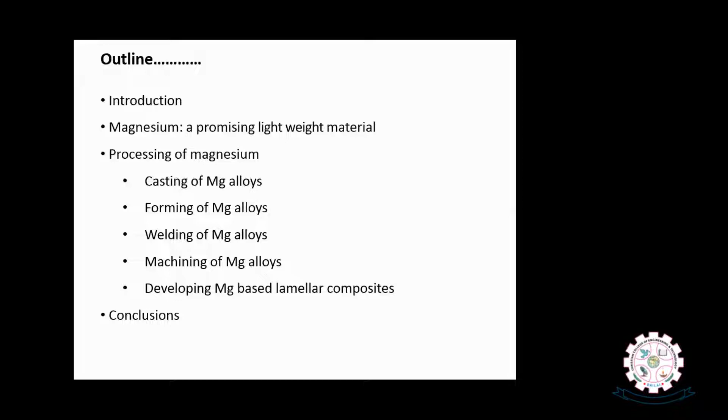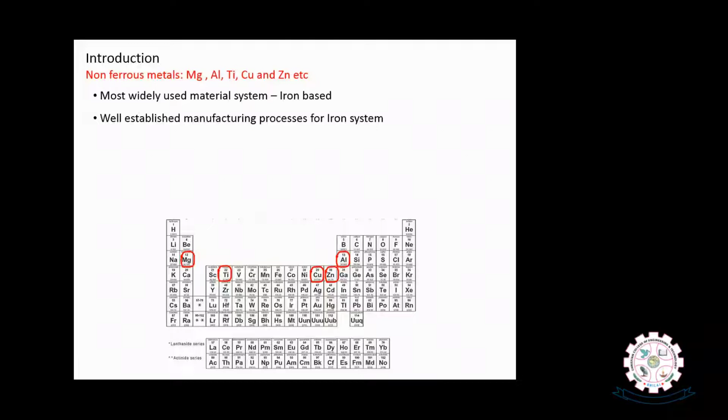In the manufacturing processes, it is well known that iron-based materials, steels, and cast irons are widely used. Whereas when it comes to non-ferrous metals, very recently for lightweight applications and with a high strength to weight ratio for better performance, even for less fuel consumption in energy efficient applications. As we know, aluminum alloys are widely used, and very recently the interest is slowly shifting towards developing magnesium-based alloys and magnesium-based composites.

There are a number of non-ferrous alloys which are used in industrial applications - magnesium alloys, aluminum alloys, titanium alloys, copper alloys, and zinc alloys. My presentation is completely focused on magnesium alloys and the processing of magnesium alloys. Why have magnesium alloys now grabbed the attention of researchers in the materials and manufacturing engineering domain, right from structural applications to even medical applications.

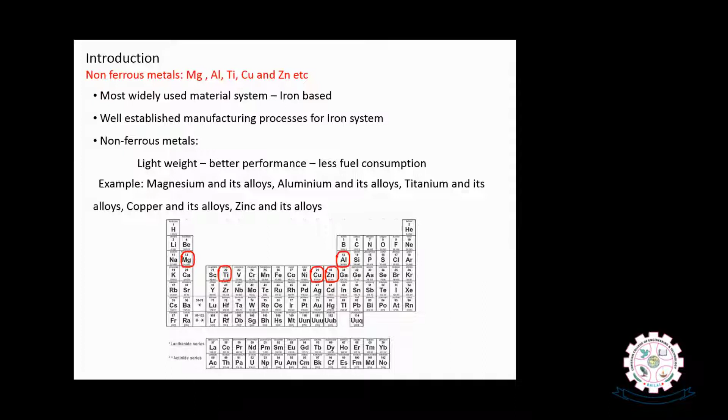So a few aspects we would like to present in this topic, and we'll see some case studies and some of our research results also. Basically magnesium is a material that is very difficult to process, but upon successfully using magnesium and its alloys as candidates to develop structures or components or parts, we can find a number of potential applications, especially in transportation industry, automobile industry, aerospace, and other lightweight structures industries. Advantages with magnesium include low density and high specific strength compared with aluminum. The density of magnesium is 30% less than aluminum, and the load bearing capacity of magnesium is higher than aluminum. So this is the beauty of magnesium compared with aluminum.

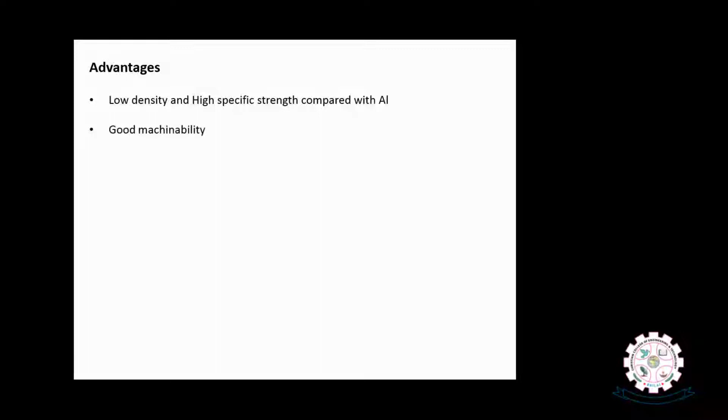And good thing about magnesium is you can machine it well. The ease of machining is good in magnesium based materials, and magnesium can be easily produced through casting, and therefore there are a number of casting methods that have been developed to produce components using magnesium alloys, such as high pressure die casting.

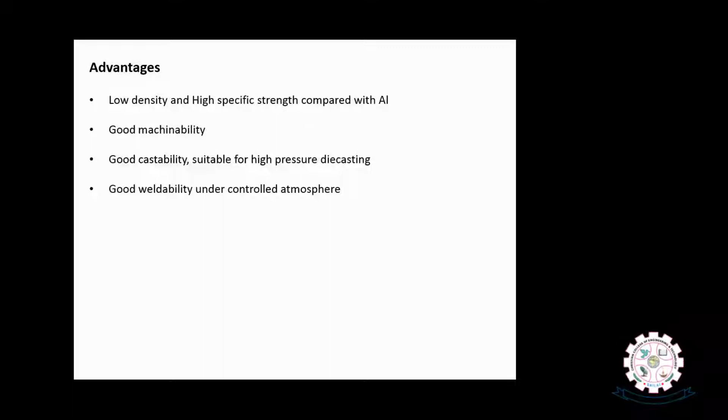Magnesium materials can be joined together by welding. However, we should use a controlled environment. We should provide controlled atmosphere to avoid oxidation.

Another important, promising property of magnesium is its excellent damping properties compared with aluminum and other non-ferrous metals and steels. This qualifies magnesium alloys as promising materials for developing structures where vibration arresting is of prime importance.

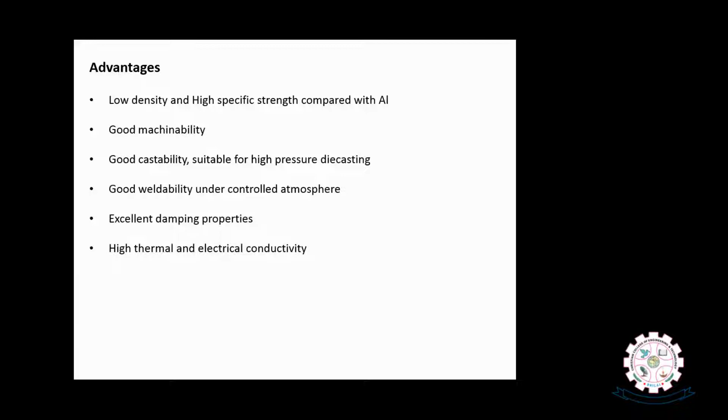Magnesium has high thermal and electrical conductivity and high dimensional accuracy and stability compared with polymeric materials, even though it is light compared with aluminum. So even comparing with polymers, which are also lightweight materials.

Magnesium being a metal will give better mechanical properties, resistance to aging, better electrical and thermal conductivity, and ability to recycle magnesium again and again to produce components. These are the advantages when we look into magnesium based materials. However, there are a number of limitations also.

That's why for the past 50-60 years, a lot of research is going on in developing new magnesium alloys and composites to address these limitations for specific applications.

Its low elastic modulus and brittleness compared with aluminum, difficulty in mechanical processing at room temperature, and limited strength and creep resistance at elevated temperatures. With respect to temperature, the ability of magnesium to withstand loads, compared with aluminum, drastically decreases.

It has a high degree of shrinkage during solidification when we adopt liquid processing routes, and high chemical reactivity, especially when exposed to a corroding environment. Compared with all other non-ferrous metals, magnesium undergoes very rapid corrosion.

It is a big problem, high corrosion rate because of high reactivity, and less formability at room temperature. It has good machinability, but when it comes to formability, magnesium needs elevated temperature to deform. We will see a couple of slides on forming of magnesium.

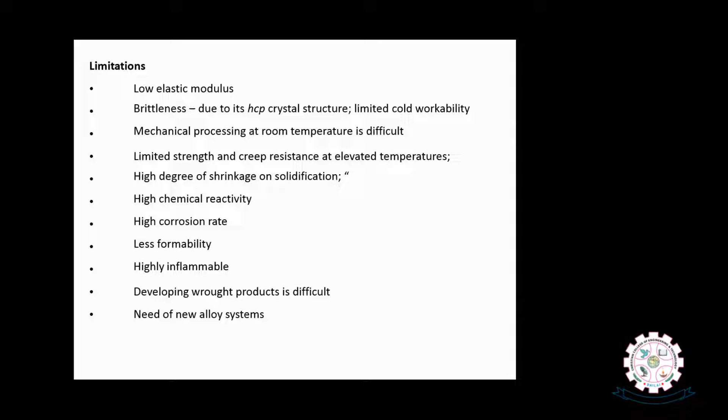When we see the usage of magnesium traditionally, the maximum portion occupies the alloying element for developing aluminum alloys. So magnesium is one principal alloying element usually added to aluminum in developing several aluminum alloys.

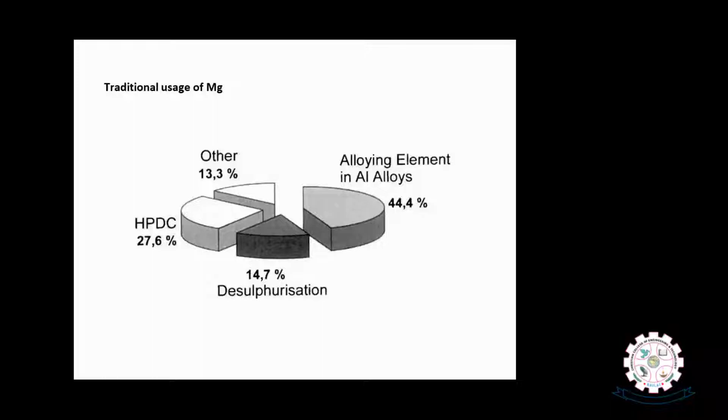It takes the major fraction, and the next fraction is high pressure die casting to produce magnesium based components. Then desulfurization and other applications are the important areas where we'll see consumption of magnesium for the past one century.

We'll also see the role of different alloying elements, the influence of chemical composition on the bulk properties of the developed alloys and composites, and how different alloys contribute.

For example, addition of lithium, zinc, aluminum, manganese and copper will give those kinds of alloys excellent specific strength at light weight, with the ability to bear higher amounts of loads.

Whereas when we add additional elements like rare earths, silicon, yttrium, such elements, the magnesium alloys developed from these elements will give better creep resistance.

And particularly, magnesium-silicon, magnesium-aluminum, and magnesium-lithium based rare earth containing alloys will give us improved ductility along with increased strength.

There are a number of processing routes developed to produce magnesium based composites, as well as particle and fiber reinforced composites. This comparison will help us understand the important role of alloying elements in improving or even affecting the bulk properties of magnesium alloys.

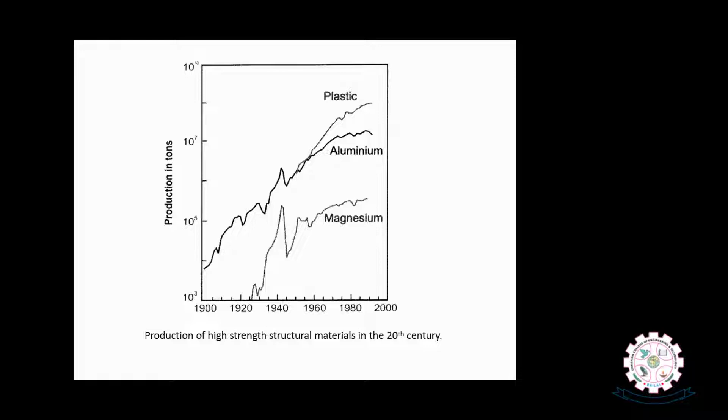In later years also, the consumption of magnesium is slowly growing compared with other materials. This indicates magnesium is becoming one vital source for lightweight structures to develop components and products, apart from the available aluminum alloys and polymer based materials.

Applications of magnesium are found everywhere, across all kinds of industries like marine, aerospace, automobile, and locomotive.

When developing components using magnesium-based materials, we usually consider three important factors: material, method of construction, and process, the technology used to produce the desired components.

When it comes to material, depending on the targeted application, we focus on required properties for magnesium alloys, such as corrosion resistance, energy absorption, creep resistance, fatigue limit, or degradation due to mechanical contact.

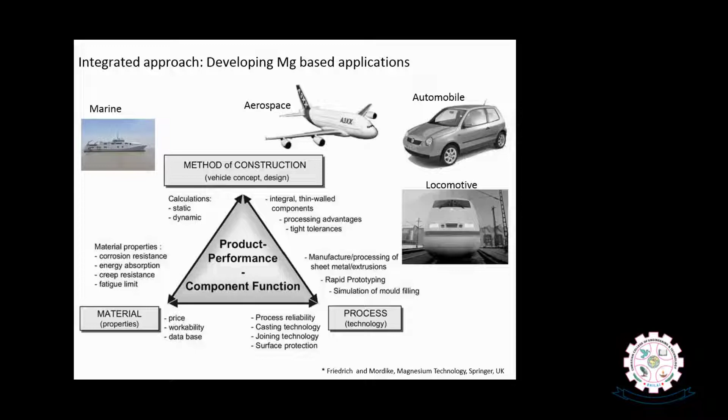These photographs show applications of magnesium in automobile components and automobile parts.

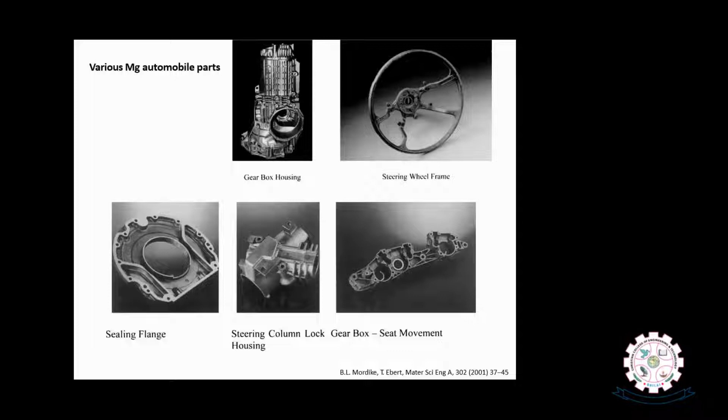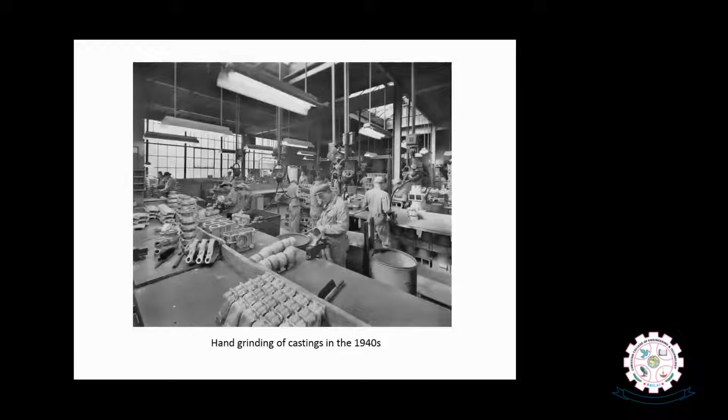In the 1940s, a typical photograph shows hand grinding of cast magnesium components in industries when they were subjected to mass production. And here the exhibition from the 1960s shows different components for different applications, made totally of magnesium alloys.

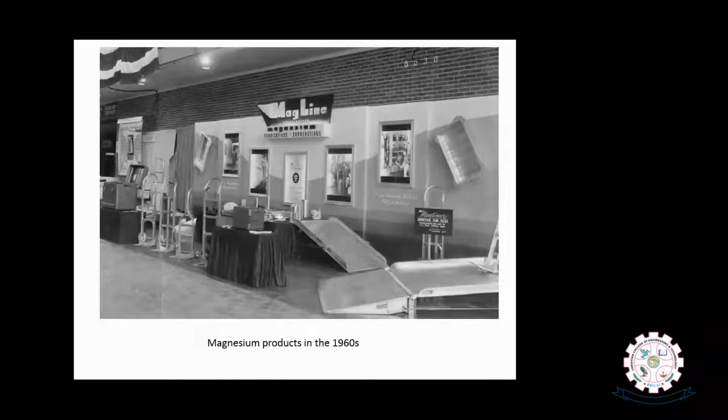So in earlier days, magnesium was the wonder material, used with magnesium-based alloys and composites to fabricate different components because of its lightweight and high load-bearing capacity.

These are different applications evolved over the past 60-70 years, from lightweight aerospace components to present casing of electronic goods, automobile vehicles, bike structures and propellers, as well as medical applications such as degradable stents, degradable orthopedic implants, screws, and bone fixing plates.

Very recently, there was a project by Volkswagen, a 1-liter car, where all the structures and components were planned to be produced using magnesium alloys.

Now we'll quickly see different processing routes that can be adopted to develop components using magnesium alloys. When it comes to casting, we basically use it to produce base alloys of magnesium, and sometimes directly components of magnesium as well. There are several alloying elements we add to magnesium to develop novel magnesium alloys.

For example, the classification of magnesium alloys can be done by considering the amount of zirconium. If we have a considerable amount of zirconium, we specify them as zirconium-containing magnesium alloys. If we don't have sufficient amount of zirconium, or negligible amount, we call that zirconium-free alloys. We'll see in the next slides why zirconium is taken as the criteria to classify magnesium alloys.

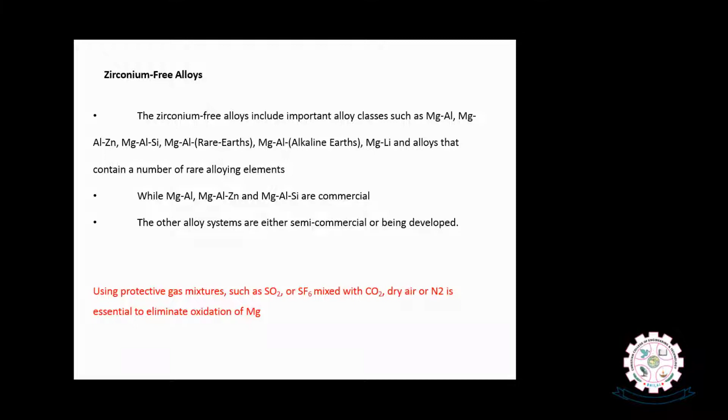And alloys which contain zirconium. The grain refinement effect of zirconium was discovered around the 1940s, and that was the criteria based on which one type of classification of magnesium alloys is zirconium based. This introduced the possibility of significantly improving mechanical and casting properties of magnesium alloys.

There are several studies, and the precise mechanism is not yet understood, but there are some proposals by which it is believed to be a grain refinement agent in magnesium. The similarity of lattice parameters between magnesium and zirconium may be the reason behind the grain refinement that we achieve in zirconium containing magnesium alloys.

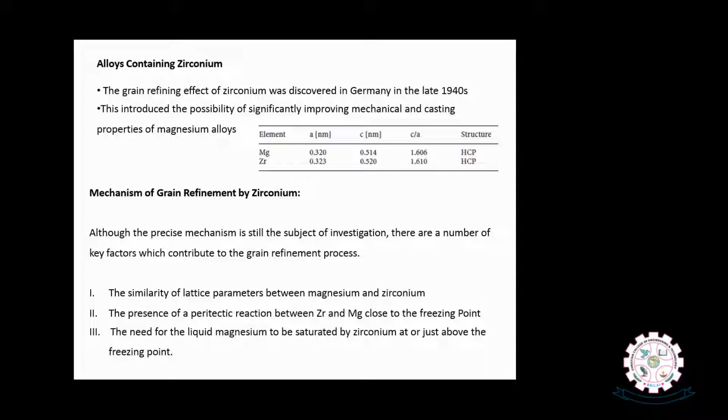There are others, like aluminum, but we don't have a specific nomenclature for magnesium alloys. Depending on the alloying system added, we sometimes say AZ series, where we have aluminum and zinc as the constituting elements in magnesium, or sometimes Al-silicon series. That means only by varying different fractions of the alloying elements do we denote the family of magnesium alloys, unlike aluminum, where we have 2XXX series, 3XXX series, 4XXX series, etc. We don't have a fixed nomenclature to define magnesium alloys. However, we have a systematic procedure where only by defining the constituting alloying elements do we name the magnesium alloys.

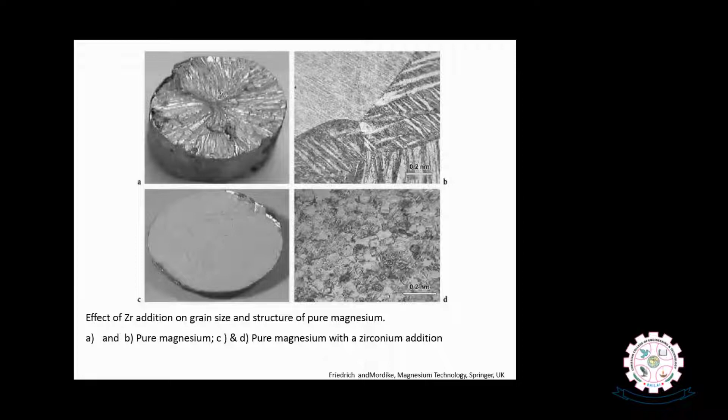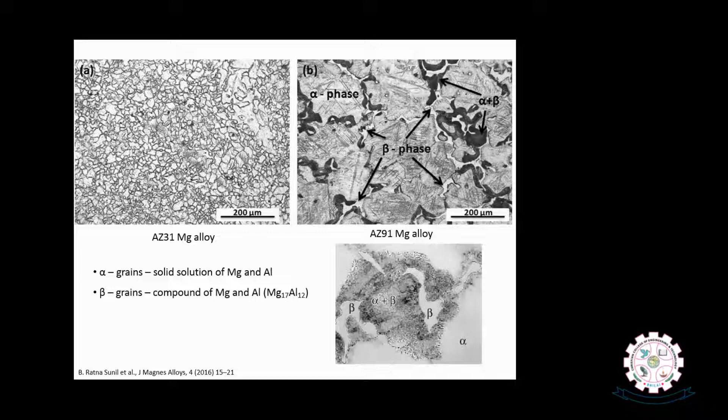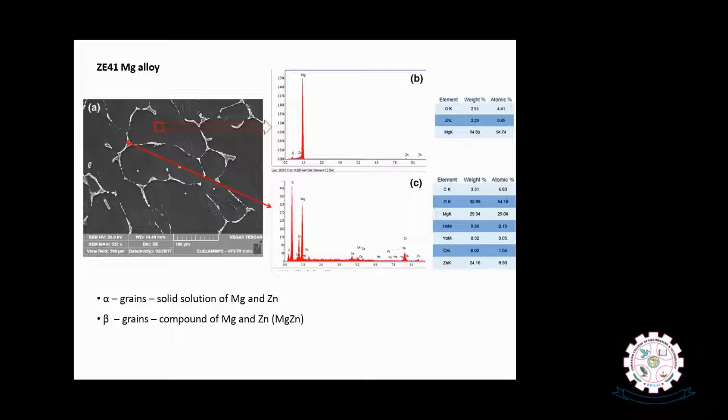This is another typical microstructure, of ZE41 magnesium alloy, where 4% zinc and 1% rare earths are added to magnesium. You can clearly see the development of intermetallics at the grain boundaries, and also alpha grains, which are the solid solution of magnesium and zinc. The corresponding elemental composition also demonstrates the presence of intermetallics at the grain boundaries.

In most cast structures, if you observe the microstructure of cast magnesium alloys, since the solubility limit of the alloying elements is very minute, limited to less than 1% or less than 2% at room temperature, if we add more amount of alloying elements, this will certainly result in development of intermetallic phases, which we see present at the grain boundaries.

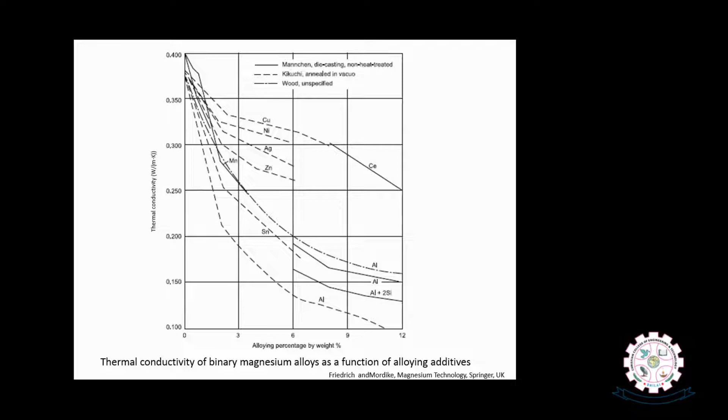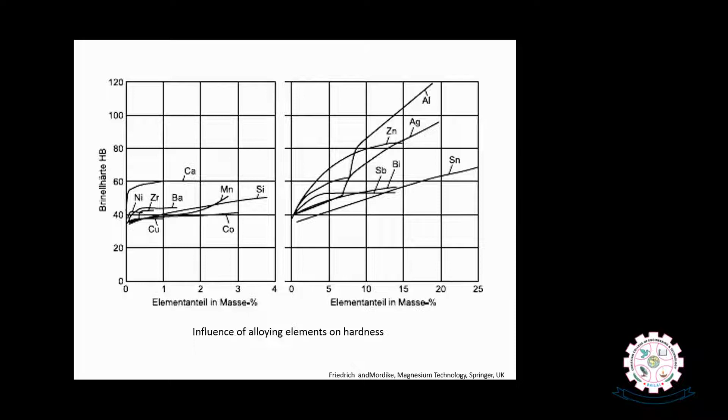So therefore, when selecting alloying elements in developing magnesium-based alloys through casting, the effect of individual alloying elements and their effect on the bulk properties of the developed magnesium alloys must be understood. Otherwise, even a minute percentage of alloying element will certainly influence the bulk properties, and we may lose the advantage of adding the alloying element to magnesium, ending up with disadvantages because of the presence of that element in excess quantities.

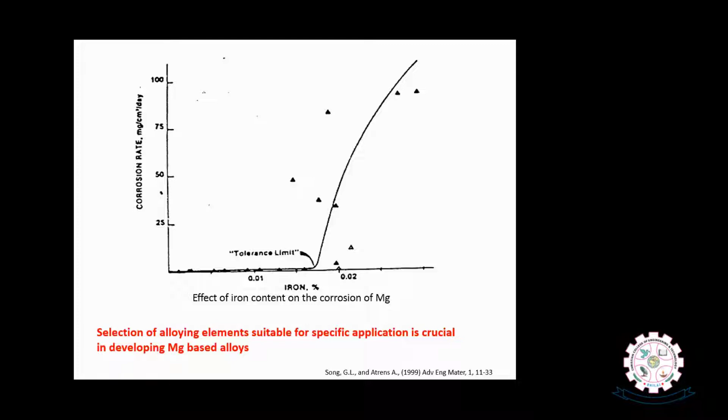So unlike other material systems like steels, aluminum alloys, and copper alloys, magnesium alloys have a great sensitivity towards the alloying elements by which that alloy is developed. That's why the presence of alloying elements dictates the bulk properties. Hence, selecting the alloying element is crucial in developing magnesium-based alloys.

Usually, pressure die casting is applied for a majority of cases in developing components by casting. Magnesium can be produced by virtually all other gravity and pressure casting methods such as sand casting, permanent and semi-permanent mold casting, investment casting, etc. The choice of a particular method depends upon many factors such as the number of castings required, the properties required, dimensions and shape of the part, and the castability of the alloy.

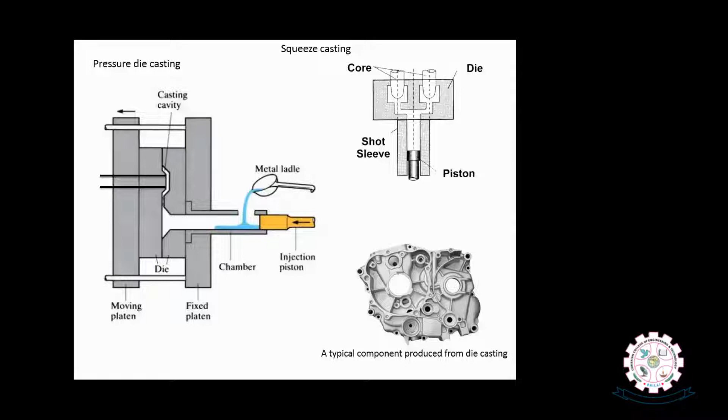So there are some typical schematic representations of pressure die casting and squeeze casting, which I'm not going to explain in detail. We can see a typical photograph of a magnesium-based component produced from casting. The beauty of magnesium is that it can be well developed into any intricate or complex geometrical shapes through casting.

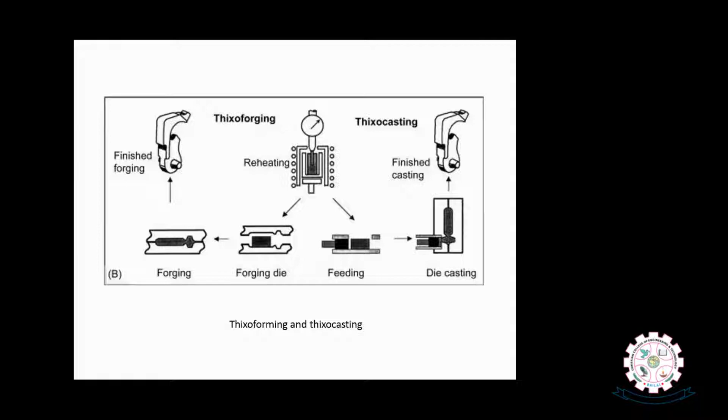Another kind of casting process is thixocasting, where we reheat the component and melt it, and through forging we apply a high amount of pressure on the dies to get the finished casting component, similar to a thixoforging process. When we compare the mechanical properties of squeeze casting and thixocasting components,

So in an overall summary, casting of magnesium is complex due to its high reactive nature because of the high oxidation possibility when it comes into contact with oxygen or open air. So necessarily, protective gas is required during the casting of magnesium based alloys or composites to develop components in casting.

Role of alloying elements must be understood on the bulk behavior of the alloy while selecting the percentage of alloying elements. It is not suggested to fabricate load-bearing structures since the cast structure itself is not as good compared with the wrought structure, in general material science principles.

Whereas when it comes to magnesium, because of its HCP crystal structure, cast magnesium components are not suggested for load-bearing applications, and large grain sizes result from casting of magnesium. Adding grain refiners such as zirconium may be considered to decrease the grain size and grain growth. Preferably, pressure die casting is suggested, which produces an advantage with the grain refined structures compared to what we produce from squeeze casting.

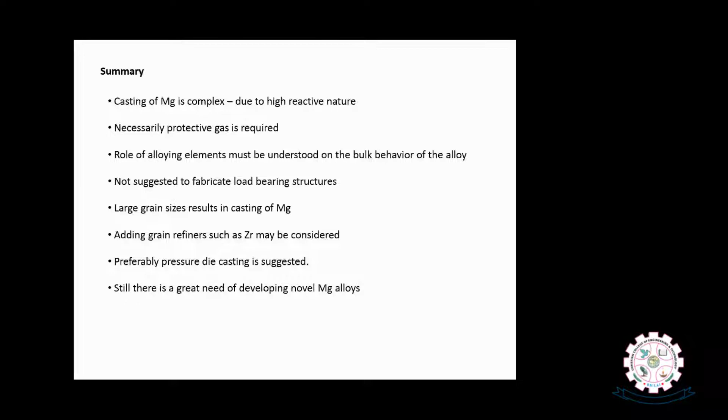Still, there is a great need of developing new magnesium alloys since the area is evolving into new levels. So development of new magnesium alloys is still challenging, and there is a lot of promise in research areas of developing new magnesium alloys.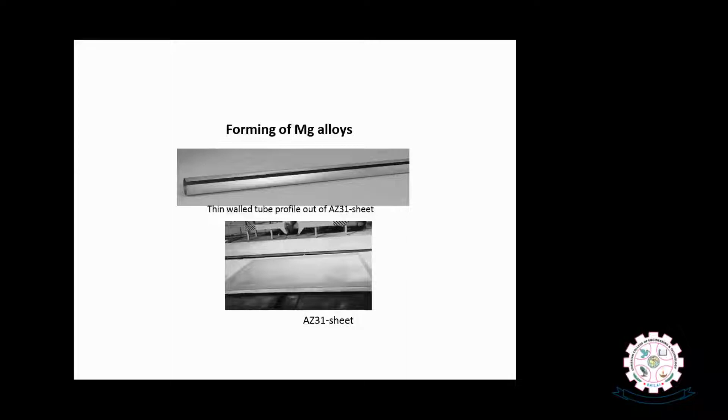When it comes to forming of magnesium, since its crystal structure is hexagonal close packed, it has only a smaller number of active slip systems, only 3 slip systems, which we find in any HCP crystal structure.

At elevated temperatures, slip also can be seen with the pyramidal planes. Whereas in order to activate slip with the vertical face planes and the pyramidal planes, we need to provide certain heat. We need to heat the magnesium alloys to certain temperatures where we can deform by activating slip in vertical face planes as well as in pyramidal planes.

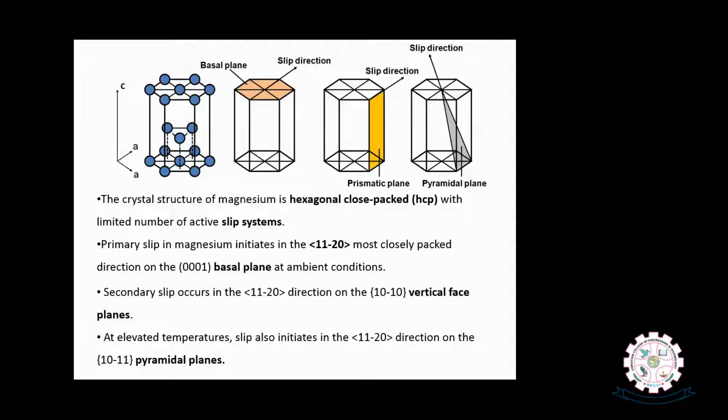That's why, due to the availability of a limited number of slip systems at room temperature, deformation of magnesium is a mechanically difficult process because of the fewer number of slip systems. Occurrence of non-basal slip in magnesium has a strong temperature dependence. In order to introduce plastic deformation in magnesium, we need to heat it. None of these slip systems induce plastic strain along the crystallographic C direction at room temperature.

On the other hand, deformation by twinning also helps aid plastic deformation of magnesium. Therefore, we'll see in microstructures of most magnesium and magnesium alloys the presence of a number of twins. Therefore, deformation of magnesium is difficult at ambient temperatures and processing at elevated temperatures is required.

So when we see the magnesium alloy phase diagrams, typically for example the AZ91 magnesium alloy, we should decide what is the temperature at which we should deform the magnesium alloys. We should adopt the deformation processes at different temperatures.

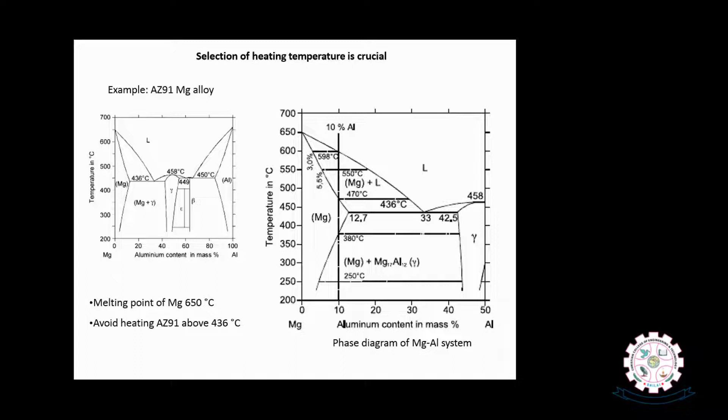And in order to initiate the prismatic planes and pyramidal planes to slip, we should at least heat above 225 degrees centigrade. Therefore, there is a range, a band between the minimum and maximum allowable temperatures, where we can heat the magnesium alloys and deform comfortably. So understanding the alloy system is crucial in order to define the process minimum and maximum temperatures in magnesium based alloy plastic deformation. If we have more alloying elements, the system becomes even more complex.

Even though pure magnesium's melting point is 650 degrees centigrade, because of the presence of 4% zinc in ZE41 magnesium alloy, it is not suggested to go beyond 340 degrees centigrade. That means our metal forming temperatures must be less than 340 degrees centigrade. So compared with the AZ91 magnesium alloy, ZE41 magnesium alloy has an even lower band of temperature ranges to deform the magnesium.

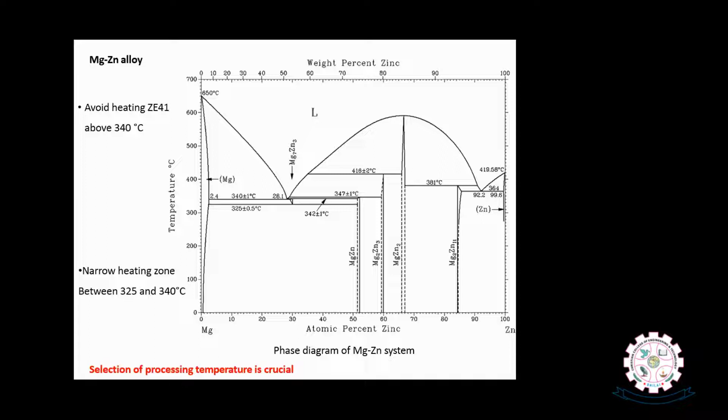Whereas the same material, AZ31 magnesium alloy in sheet form, when deformed between two corrugated dies in groove pressing at 300 degrees centigrade, has been successfully deformed because of the activation of the other slip systems, the prismatic and pyramidal planes.

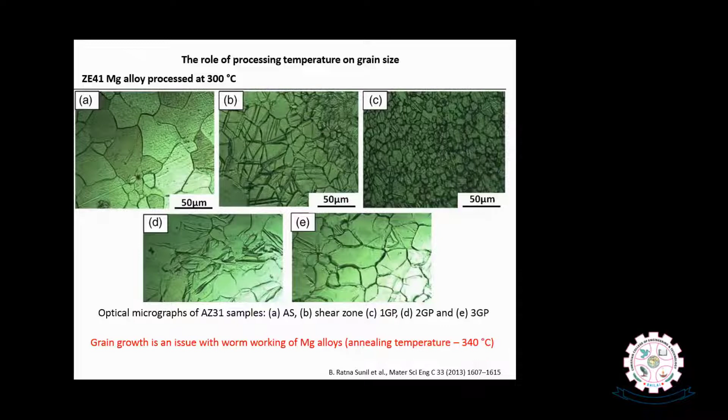So care must be taken in selecting the processing temperature of magnesium alloys if achieving and retaining grain refinement is the prime objective. You can see the grain size distribution of AZ magnesium alloy processed at different numbers of cycles at the same temperature, 300 centigrade.

With the number of cycles, you can see the grain size has increased. This is because of grain growth due to the exposure of the material for a prolonged time at a temperature close to the annealing temperature. But anyway, we are handicapped with the HCP crystal structure.

We have to heat the material to a certain temperature, about 225 degrees, to plastically deform it. Therefore, you must work properly to fix the temperature and the heating duration in order to achieve the grain refinement benefit, or to retain the grain refinement benefit achieved during the initial cycles.

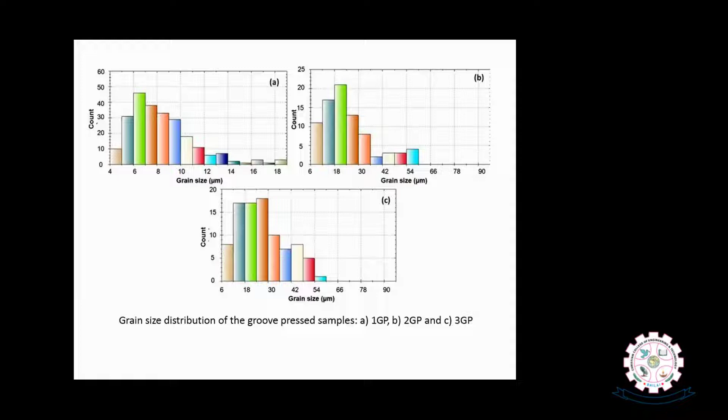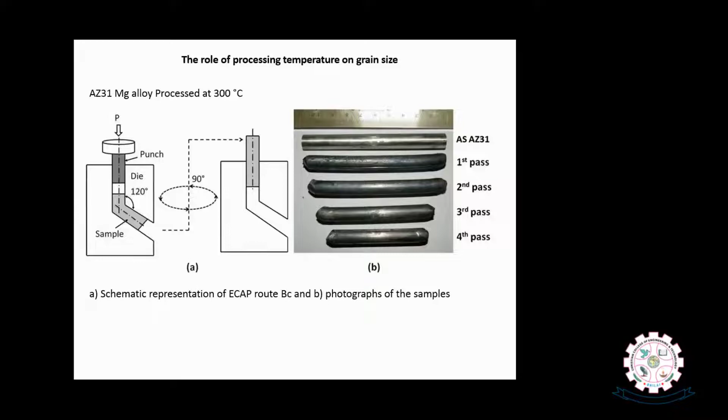Here you can see the same AZ magnesium alloy material processed at 300 centigrade, compared with 100 degree centigrade in the previous slide where we saw total fracture of the material. But here at 300 centigrade, at different numbers of passes, we have repeatedly processed the same sample up to 4 cycles, and you can see the material is successfully plastically deformed with no fracture observed.

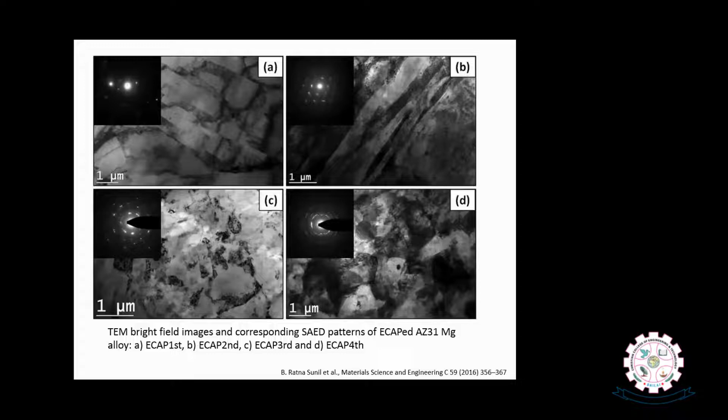Therefore, developing magnesium wrought products is challenging, but using the recently developed metal processing technologies, if we are able to achieve this, we can produce increased strength as well as increased ductility in these wrought magnesium products.

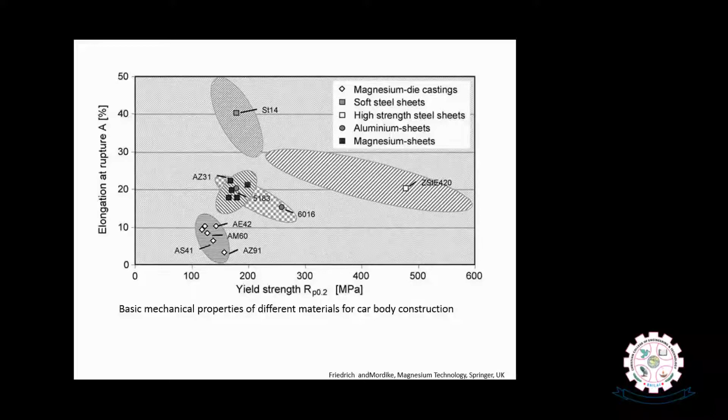In overall summary, when it comes to forming of magnesium alloys, it is simple and can be formed, but not at room temperature. There are some difficulties involved with magnesium deformation. Therefore, it is required to be heated above 225 degrees centigrade, where these prismatic planes as well as pyramidal planes also get activated. So a sufficient number of slip systems will be accommodated to plastically deform magnesium at high temperatures. Magnesium-based components subjected to forming operations exhibit better mechanical, corrosion, and wear properties compared with cast components.

Care must be exercised to retain the microstructure in cyclic processing, because we are again and again heating the same material to a temperature close to the annealing temperature. Therefore, whatever benefit we achieved during plastic deformation in altering the microstructure and reducing grain size, we may lose because of the working temperature being close to the annealing temperature.

Using a solid lubricant such as molybdenum disulfide or graphite is essential in deformation of magnesium. Specially designed furnaces are required, where in parallel we should provide heating as well as some mechanical loading. So forming operations can be done at relatively lower loads for magnesium alloys compared with other non-ferrous alloys, which is an advantage.

When it comes to welding of magnesium, it can be done with conventional welding processes, both fusion and non-fusion welding processes, with a few technical challenges which can be addressed by taking precautions that we'll see in a couple of slides.

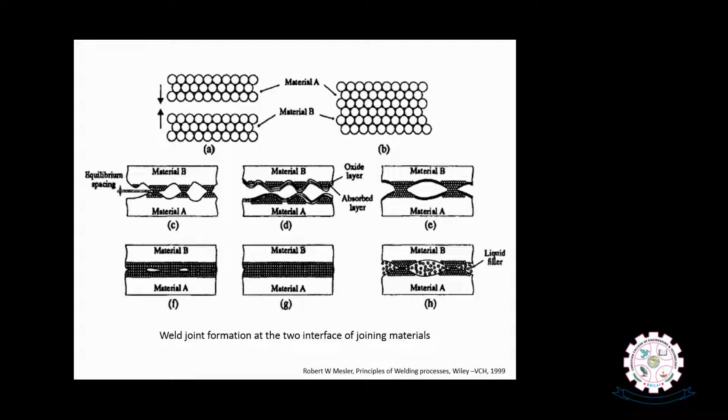So in magnesium, the oxidation problem is higher. Magnesium readily gets oxidized when it comes into contact with oxygen in open air. Certainly, we should apply heat or pressure.

Oxidation is a big problem with magnesium, and also the melting point and boiling point of magnesium are lower. Therefore, in fusion welding processes, sometimes we get temperatures of more than 1000, 2000, 3000 degrees centigrade in the flame. At such temperature, magnesium may evaporate. That is another technical problem.

Overheated coarse grains result in the magnesium weld joints, and hot cracks occur during the cooling process. Once the welding process is over, development of cracks is another big problem in magnesium alloys, along with presence of pores, and welding heat stresses are the usual challenges associated with welding of magnesium.

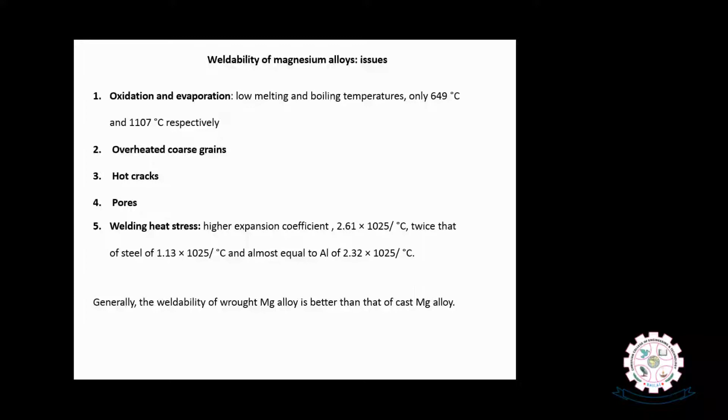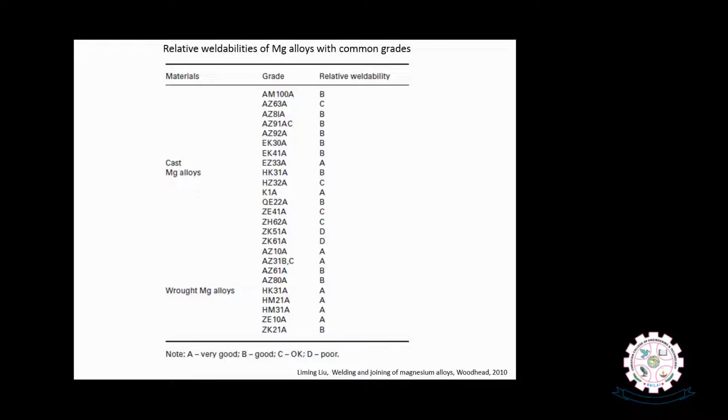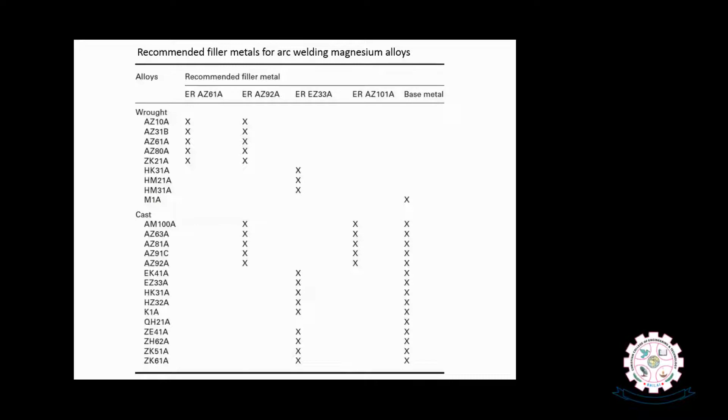In fusion welding process, the welding wire and the base material both melt together, and they provide the required melt pool in the weld joint. This applies to welding of alloys, both similar and dissimilar materials.

Dissimilar metal welding is influenced by many factors, such as different melting points. Dissimilar metals usually possess different melting points, so it is challenging to come to an amicable melting temperature between them, along with differences in coefficient of thermal expansion of both alloys. Heterogeneity in chemical composition and formation of intermetallics from the alloying elements in liquid state is another big challenge when joining dissimilar metallic systems.

Among dissimilar metal combinations, if one is magnesium, it is more difficult than common welding processes, especially for magnesium and aluminum alloys. So the welding processes usually adopted for magnesium alloys are tungsten inert gas welding, laser welding, laser-TIG hybrid welding, friction stir welding, and diffusion bonding.

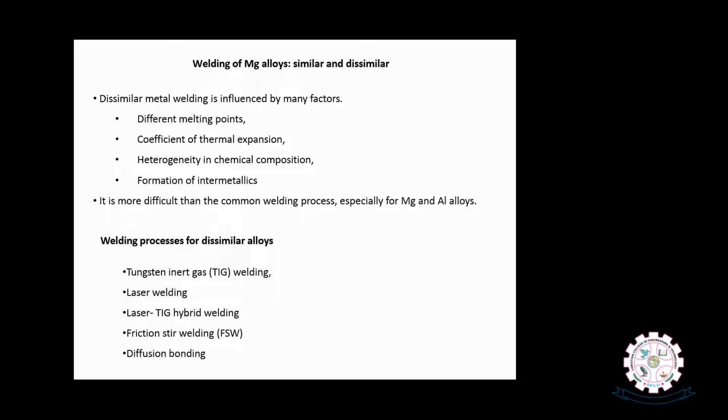Among the available processes for welding magnesium, solid state processes are promising. Among them, friction stir welding is widely used for the past 20-plus years, in which a non-consumable rotating tool is inserted into the materials at the joint where they are intended to be joined. In friction stir welding, when the rotating tool is inserted into the joint, the process is completed in three different steps: first plunge and dwelling, then traveling in a traverse direction, and then retract.

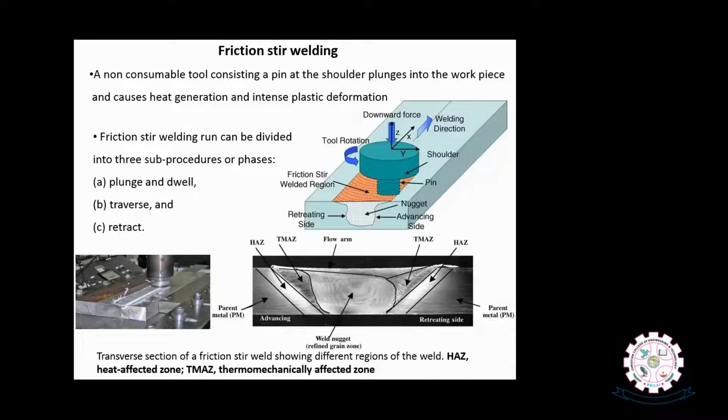Whereas in friction stir welding, you can see the stir zone where the material does not undergo melting. However, within the solid state itself, the material is subjected to plastic deformation, and a perfect metallurgical continuity between the two metal surfaces at the interface can be achieved. Usually it contains a nugget zone, thermomechanically affected zone, and heat affected zone, and then adjacent to that, the base materials, as shown in this cross section of the friction stir welded alloy.

Here we see a couple of joints which we developed by friction stir welding of similar and dissimilar magnesium alloys. Typical cross-sectional microstructure of similar AZ31, AZ31 magnesium alloy can be seen here.

With respect to the processing parameters, at all processing parameters we achieved a perfect weld joint, whereas the processing parameters, particularly tool rotation speed, has shown significant role on altering the grain size in the weld joint.

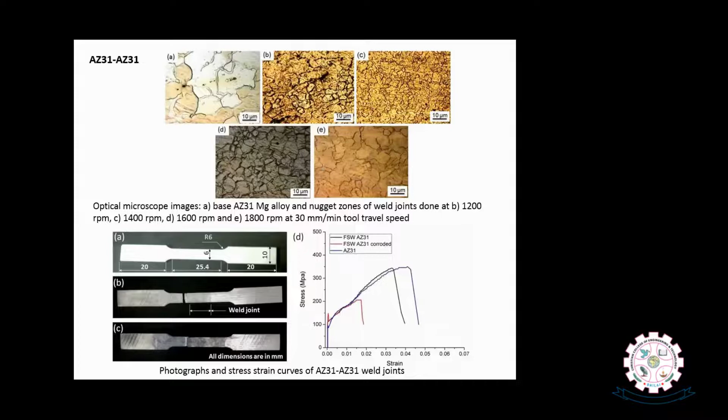So the weld joints were subjected to a corroding environment, exposed to corrosion, and then tensile samples were prepared from those samples. We investigated the effect of corroding environment on the mechanical failure also, and the friction stir welded joint has shown better strength compared with the base material because of the smaller grains which we achieved in the weld joint in solid state itself.

Whereas at 1400 RPM and 25 mm per minute, we have achieved a sound joint without any cracks and without any tunneling defects and other defects.

The main processing parameters that we observed in friction stir welding, two important process parameters are tool rotational speed and tool feed, in addition to other minor influencing process parameters.

Among them, with higher speed, the generation of heat will be higher because of the friction between the tool surface and the workpiece, and also friction between the pin surface and the rotating workpiece material.

If the feed rate is lower, the heat concentration will be higher in the processed zone. Therefore, higher tool speeds and lower feed rates usually result in more heat concentration in the weld zone, which may lead to defects as well as grain growth, if at all defects are not present.

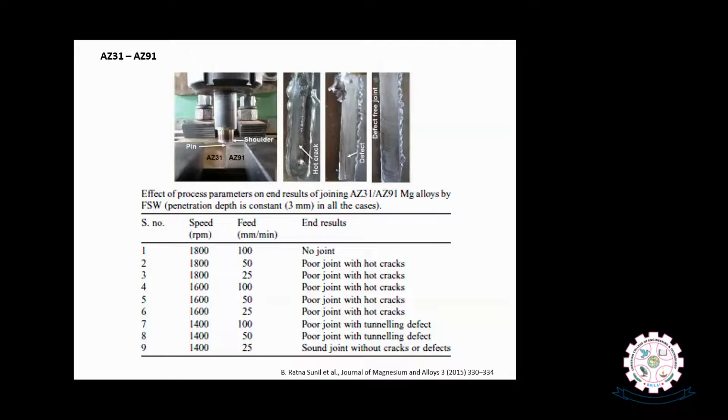So the advantage of decreased brittle intermetallic in the weld zone will improve the strength. Also, the advantage of smaller grain size improves the strength of the weld joint.

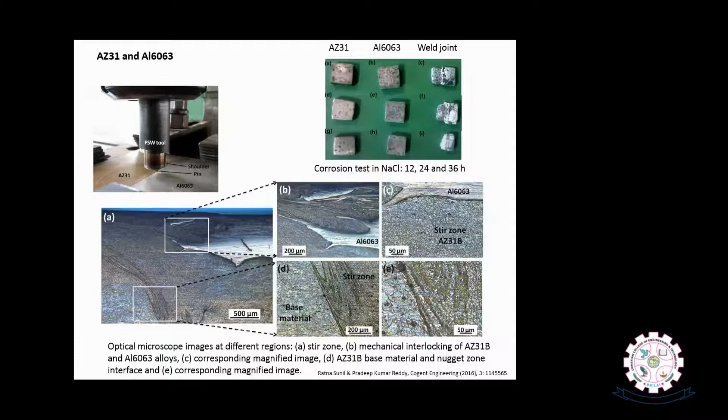Therefore, magnesium will be gradually degraded. So dissimilar metals, particularly joining dissimilar metals, may have an ill effect on the corrosion performance of the magnesium. If during application the structures are exposed to a corroding environment or come into contact with it, special care must be taken to avoid the corrosion problem of the magnesium.

Another magnesium and aluminum dissimilar joint was performed by friction stir welding, here joining AZ91 magnesium alloy with 6063 aluminum alloy. A number of processing parameters were adopted to develop a sound joint without defects, and after carrying out different experiments, we obtained an optimum set of process parameters at 1100 RPM with 25 mm per minute feed rate.

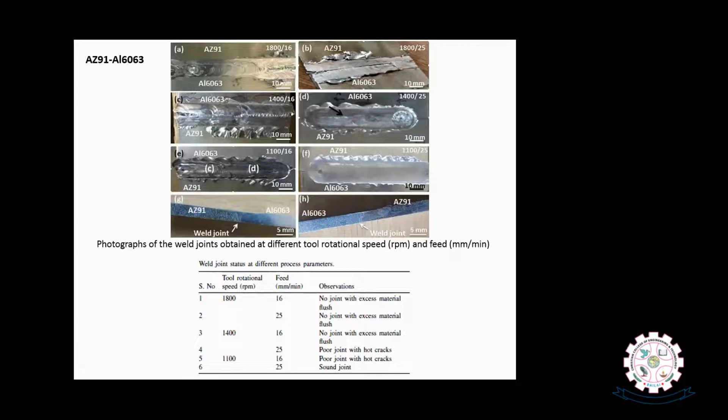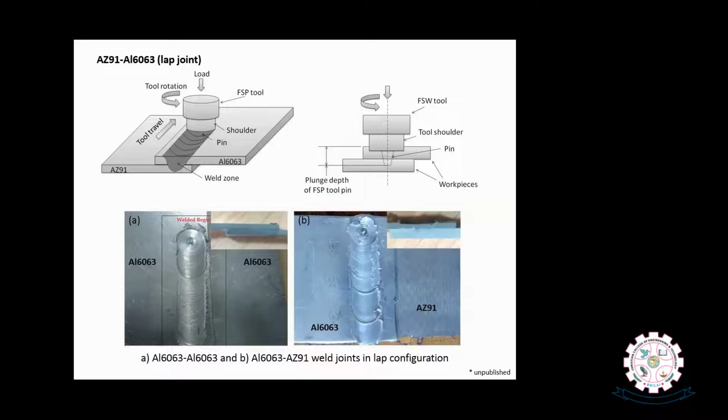Here, a lap joint of magnesium alloy and aluminum alloy was developed by the same friction stir welding process, where we placed the aluminum alloy sheet on top of the magnesium alloy sheet. Since aluminum has more deformation compared with magnesium alloys, we selected aluminum alloy on top. You can see the typical photographs and schematic diagrams of the process.

Interestingly, you can see the joint formation between the aluminum and magnesium base materials. The defect-free joint length was measured in the width of the weld joint, and we observed it decreased with increased penetration depth.

Since this is a lap joint, tool penetration plays a very important role, and we altered the penetration depths by 0.05 mm increments. With increased penetration depth, defect zones were observed to increase, so the optimum penetration depth was found to be 0.2 mm - that is the excess penetration given to the tool in addition to the actual pin length.

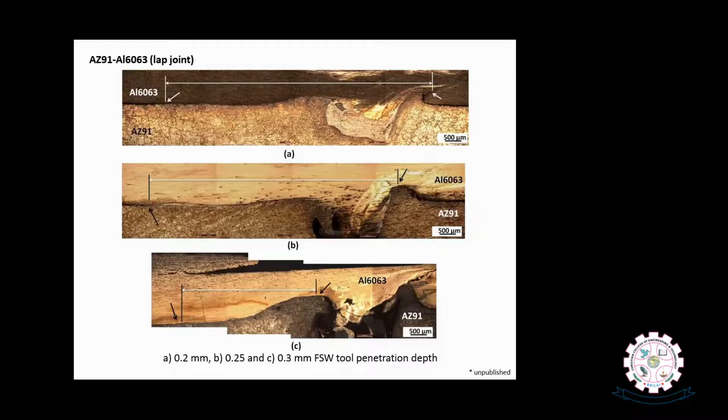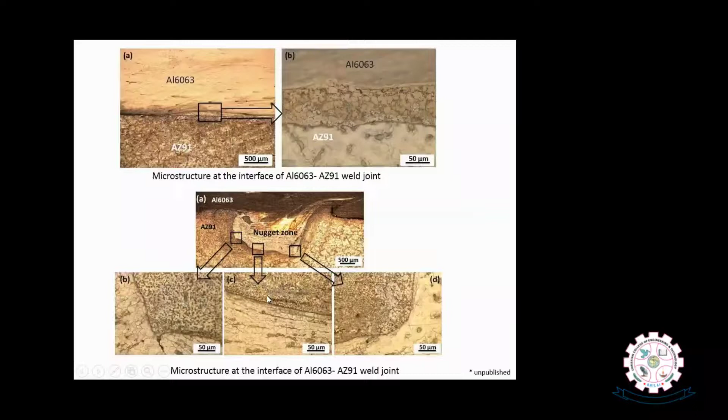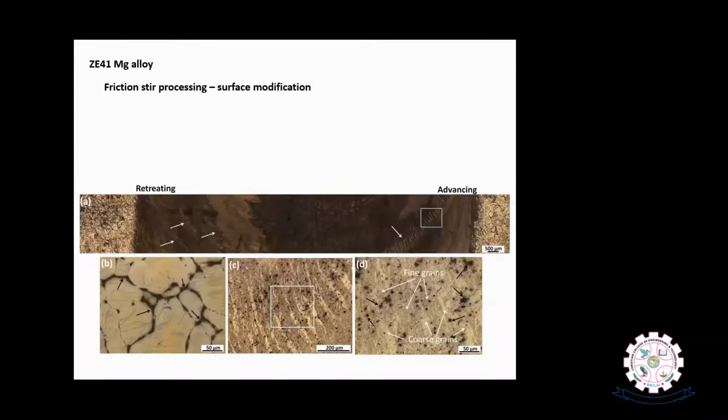Another magnesium alloy, containing zinc as well as rare earths as alloying elements, was processed by friction stir processing - another solid state processing technique developed from friction stir welding - and the properties were evaluated.

This indicates that excess zinc has been introduced into the magnesium lattice, and supersaturated magnesium-zinc grains were developed, with the intermetallic percentage decreased. These two factors influenced the improved mechanical properties and machining properties of the same ZE41 magnesium alloy in other studies.

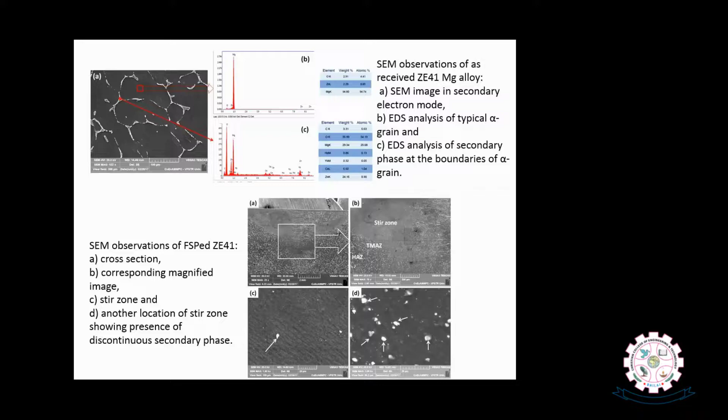In overall summary, welding of magnesium alloys is technically challenging. Protective gas is essential to avoid oxidation in fusion welding, and the formation of intermetallics is higher in fusion welding processes.

Solid state welding techniques address the issues associated with liquid state welding. Welding of magnesium with dissimilar alloys increases the complexity. Friction welding and friction stir welding are simple and promising routes in solid state welding, which avoid the limitations usually associated with fusion welding of magnesium alloys.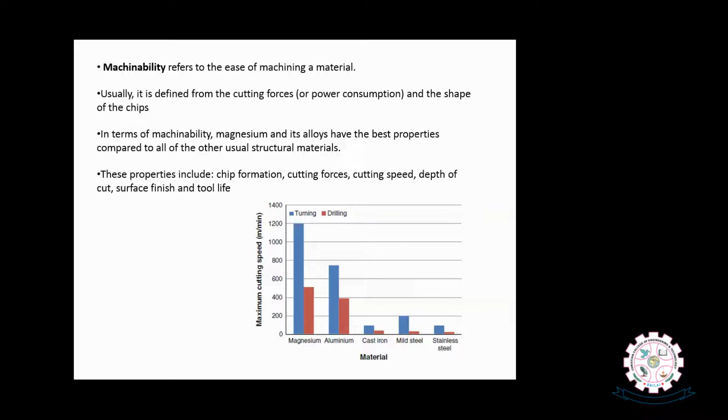Now quickly we will see the machining of magnesium alloys. Compared with aluminum, cast iron, mild steel and stainless steel, machining of magnesium is simple since it has good machinability, usually defined from the cutting forces and shape of the chips. In terms of machinability, magnesium and its alloys have the best properties compared to other usual structural materials. These properties include chip formation, cutting forces, cutting speed, depth of cut, surface finish, and tool life, all better compared with other material systems.

But the challenges are: in case of magnesium, the temperatures generated during machining are low due to its high specific heat and thermal conductivity, which causes heat to be rapidly dissipated. Magnesium presents a significant ignition risk when the process temperature exceeds 450 centigrade. So while machining magnesium, selecting the coolant is crucial. Even without coolant we can machine magnesium, because the heat dissipation capacity for magnesium alloys is very high compared with steels and aluminum.

However, if you are using coolants, we should select ones that are free from water, because of the risk of ignition, making the decision to use or not use cooling lubricant critical. Additionally, we must consider the danger associated with water-based fluids due to magnesium's reactivity with water, forming hydrogen which is flammable and potentially explosive, as shown in this equation. So it is suggested not to use water-based coolants. Dry machining of magnesium can be conveniently done, and if you would like to use coolant, it is suggested to use water-free coolants.

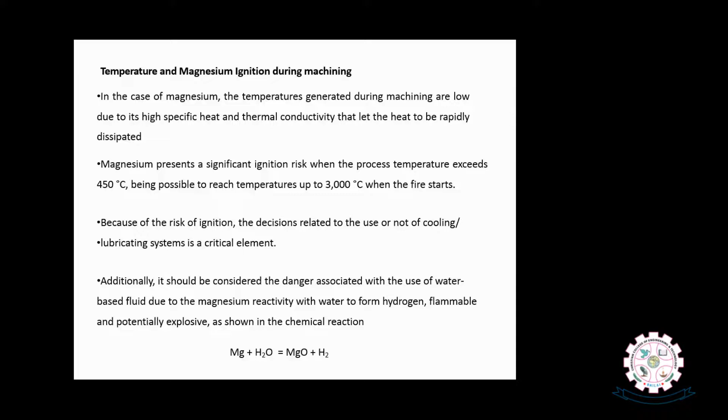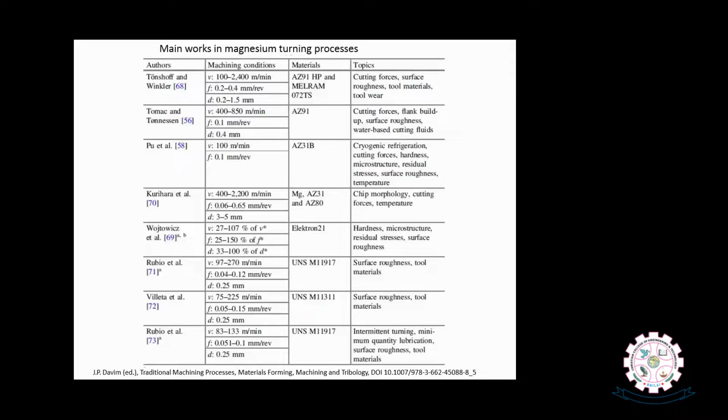These are significant studies done on magnesium-based alloys on machining with different machining conditions and operations. Most of these studies established the machinability of different magnesium alloys across a wide combination of machining parameters and conditions.

Here a typical study we have done, we'll see. We have processed a magnesium AZ91 alloy by friction stir processing and developed a fine grained structure as shown in this diagram. You can compare the microstructure of AZ91 magnesium alloy base material with the friction stir processed material. In the friction stir processed material, interestingly, the secondary phase was significantly decreased, and the grain size compared with the base AZ91 alloy showed excellent grain refinement.

Here we have two important factors: grain size is very small, and the amount of intermetallic phase is also significantly decreased compared with the base material. These two important factors gave better machining behavior.

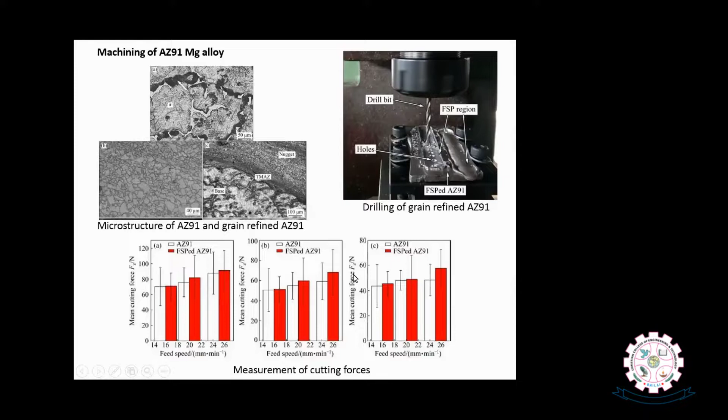However, in the measurement of cutting forces, increased cutting forces were observed. When the quality of the produced hole edge was investigated, the delamination effect and material removal at the edge were found to be excellent for the smaller grained AZ91 magnesium alloy. In unprocessed AZ91 magnesium alloy, we have two distinct regions of different mechanical properties: one is the alpha region, and the other is the highly brittle intermetallic region at the grain boundaries.

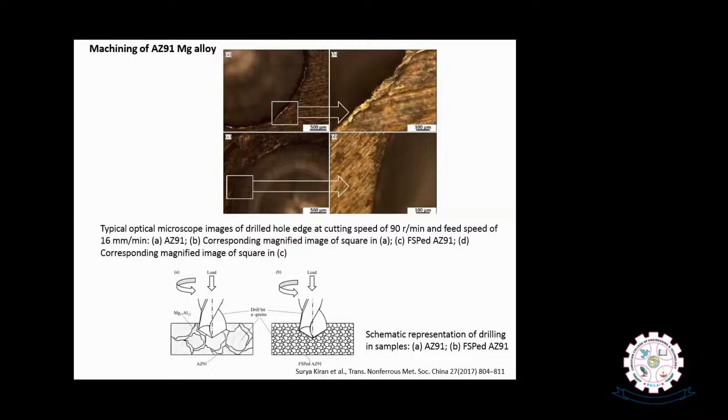Whereas in the grain refined AZ91 magnesium alloy, we have uniform distribution of intermetallic, with an excess amount of dissolved alloying element in the magnesium lattice, and also decreased intermetallic phase, which decreased the heterogeneity in the distribution of mechanical properties within the structure. Therefore, even though higher cutting forces were recorded due to increased strength during machining, the produced surface, compared with the unprocessed alloy, showed excellent finishing.

This is another typical study we have done. We altered the microstructure of AZ91 magnesium alloy by heat treatment process, and we observed that with a lower amount of intermetallic and decreased eutectic regions of alpha and beta, better machining behavior was observed, with decreased cutting forces. The resulting chip morphologies were also studied, and a combination of morphologies were observed, with continuous chip formation and lower cutting forces observed for the heat treated AZ91 magnesium alloy.

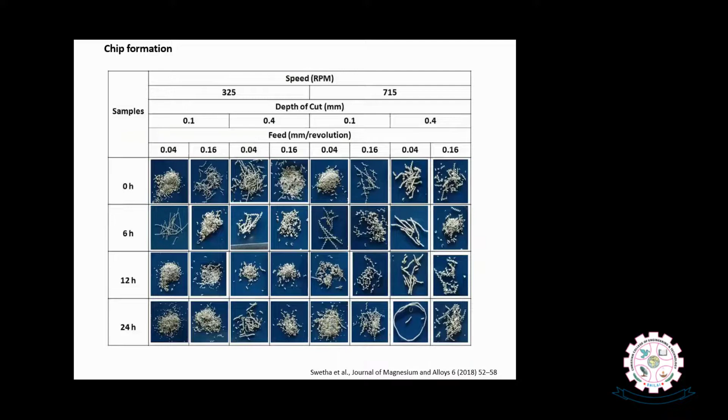In summary, magnesium is a material with good machinability in comparison with other usual structural materials.

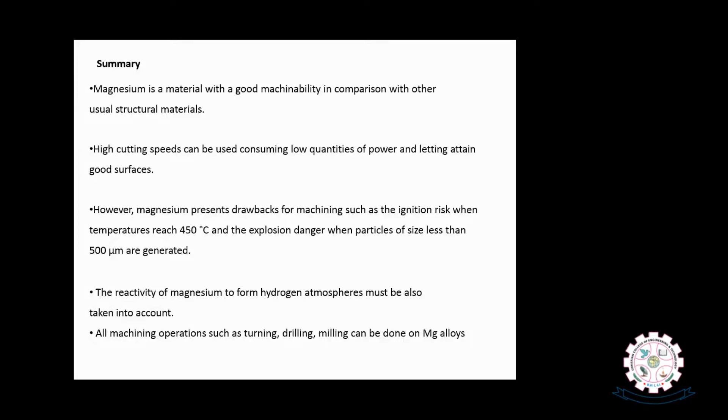High cutting speeds can be used, consuming low quantities of power and letting attain good surface finish. However, magnesium presents drawbacks for machining, such as the ignition risk when temperatures reach beyond 450 centigrade, and the reactivity of magnesium to form hydrogen atmosphere must also be taken into account. All machining operations such as turning, drilling, and milling can be conveniently done by any cutting tools on magnesium alloys.

Quickly, we'll see a couple of slides on magnesium-based composites by the powder metallurgy route. We adopted ball milling, where we mixed the powders of magnesium as well as calcium phosphate ceramic phase, what we call hydroxyapatite, for biomedical applications. We did 20 hours of ball milling at 200 RPM, and then spark plasma sintering of these ball milled powders at 450 centigrade by applying 50 megapascals load for 10 minutes in vacuum.

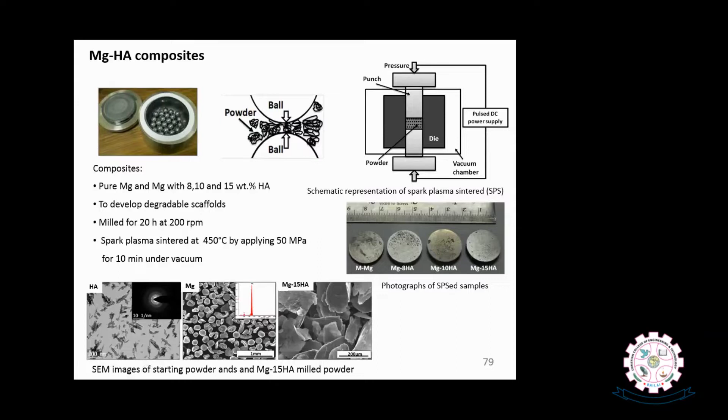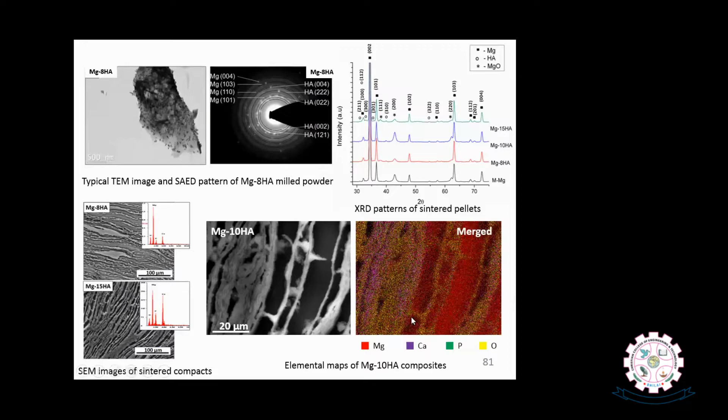After sintering, we clearly noticed the retention of hydroxyapatite as it is, confirming the stability of the hydroxyapatite phase in the sintered composites. We also observed the formation of a lamellar, microlamellar structured composite, because the ball milling deformed the magnesium particles into thin flakes. These thin flakes were then sintered, and the sintered structure shows a lamellar microstructure. A typical elemental mapping also confirms the presence of calcium and phosphorus in these composites.

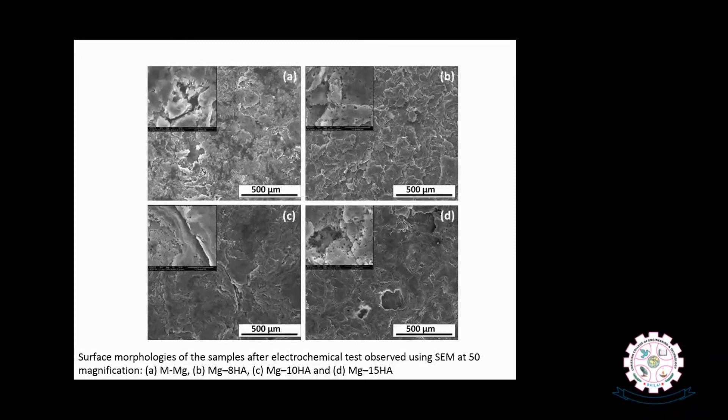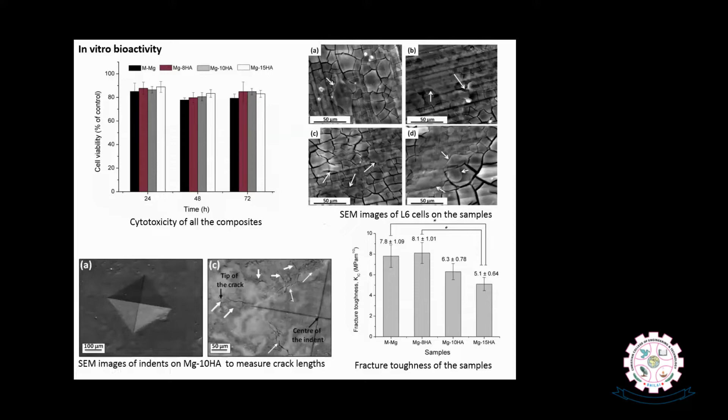The corresponding composites were subjected to corrosion testing, and the sample surfaces were investigated and compared with composites where magnesium underwent higher degradation with numerous cracks. The electrochemical test also confirmed that among all the compositions, the 8% and 10% composites have shown a lower amount of corrosion. So, the ball milled composites help improve both the magnesium mechanical properties as well as corrosion properties. Then the toxicity studies towards 3T3 cells and L6 cells also can be seen here, and the SEM images clearly show the presence of cells spreading on the composites, indicating the developed composites are biocompatible for biomedical bone implant applications.

Developing magnesium based composites by powder metallurgy is another promising way where we can tailor the composition of magnesium composites by choosing appropriate dispersing phases. However, sintering must be carried out in a protective environment or vacuum to avoid oxidation issues, since magnesium is highly active and can immediately get oxidized. So there is a lot of scope in research and development of new magnesium alloys and composites, and processing of magnesium alloys and composites by various material processing technologies.

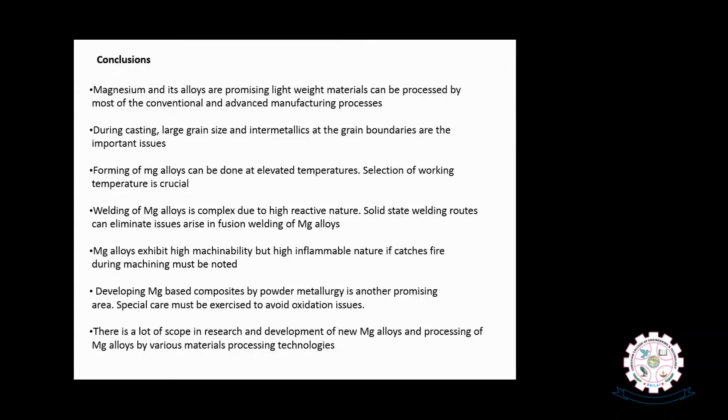I would like to acknowledge my research guides and faculty and scientists at different institutions and organizations who helped me to complete the research works, and my PG, PhD and UG students.